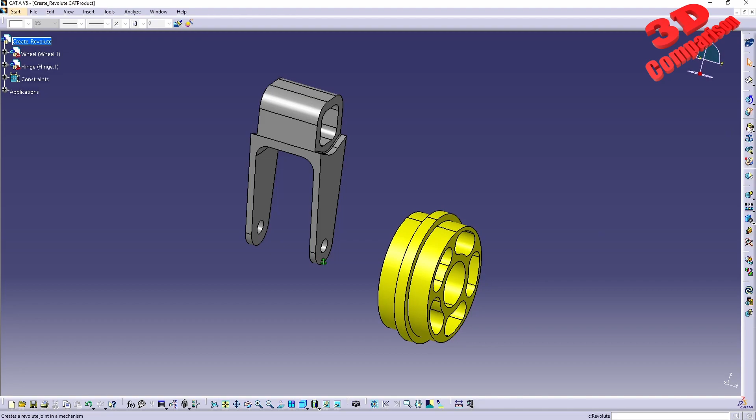And the first thing that we need to do within DMU Kinematics is to define the fixed part. So in this case, I will create a new mechanism. I will define a new fixed part for the hinge. And afterwards, using the revolute joint, I will select the axis. I know that in this case, I need to leave an offset of 2 millimeters over here. So I'll go for offset and 2 millimeters.

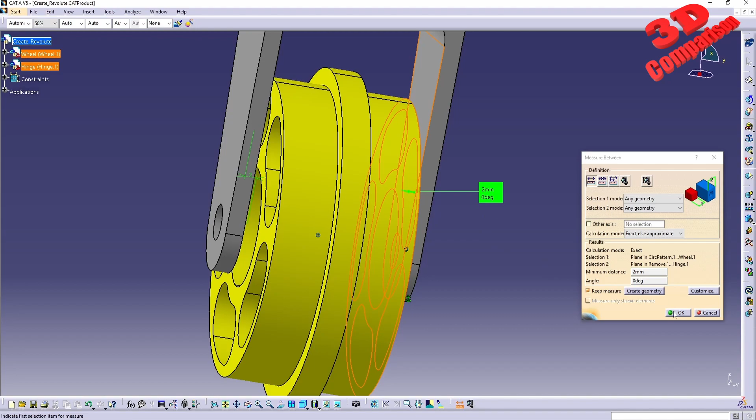And we're going to see that we're going to have the wheel centered. If I measure the distance over here, we're going to have those 2 millimeters just like we added over here. And if I expand the mechanism, we're going to see that we have a degree of freedom 1, because we still need to define this revolute to be angle driven in order to simulate it.

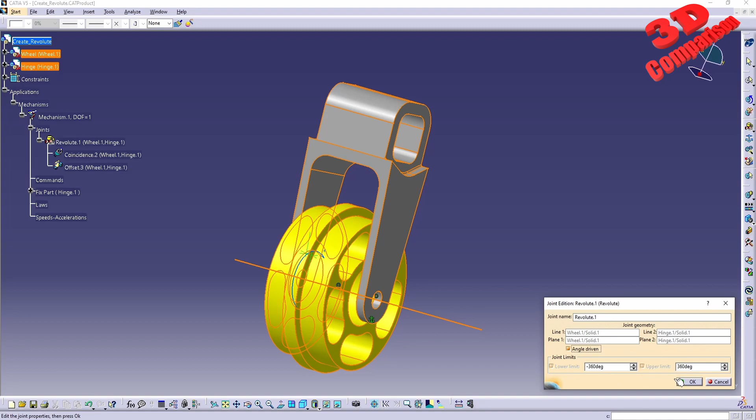So as soon as I choose this to be angle driven, we're going to see that the degree of freedom will go to 0. We can now simulate the mechanism. And if I select the mechanism, I will be able to simulate that. So this is a simple mechanism where we only had one joint underneath that mechanism.

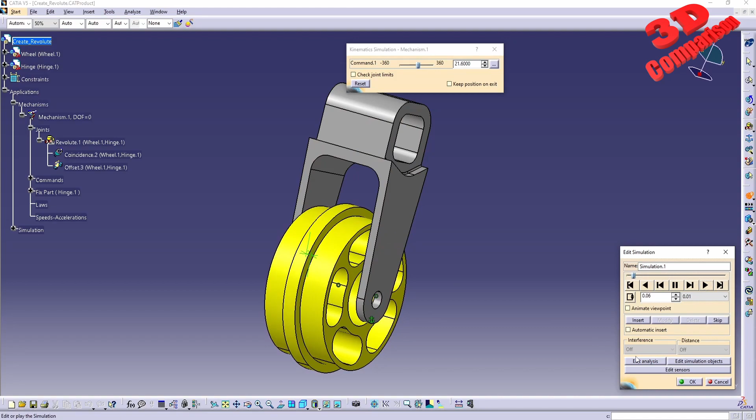But let me copy the same wheel and hinge over here and see how we can join those two within the same mechanism. So I will delete the existing mechanism over here. You can just select it and hit delete. Now I will copy the wheel. So select that, paste. We have the second wheel added, and I want to copy the hinge as well. So copy that and paste it again.

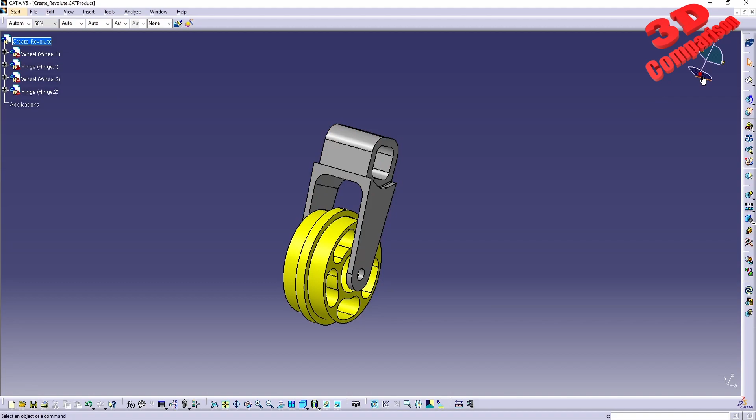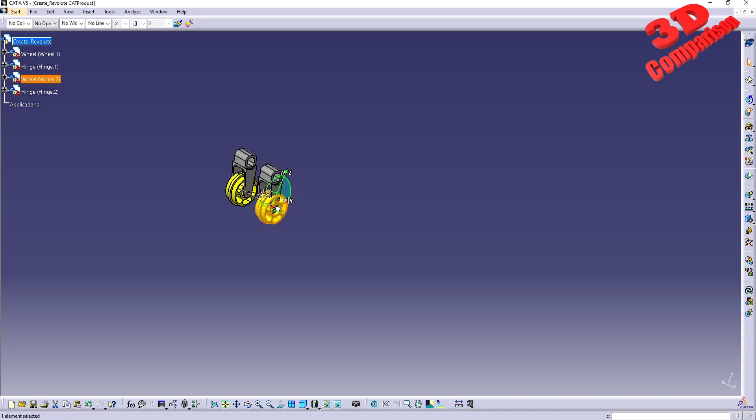Now, using the compass, I will move the second hinge. As we can see over here, the compass will not be centered to the object in this case. I will just move it over here. I will do the same with the second wheel over here. So I will just slightly position it over here, because afterwards we are going to constrain that using joints.

Now, if you want to add this to the same mechanism, it would be wise to add a subassembly and add both of those hinges within the same subassembly. So go to insert, insert a new product, and I will drag and drop those two hinges underneath the secondary product over here. So we have one moved, afterwards the second one.

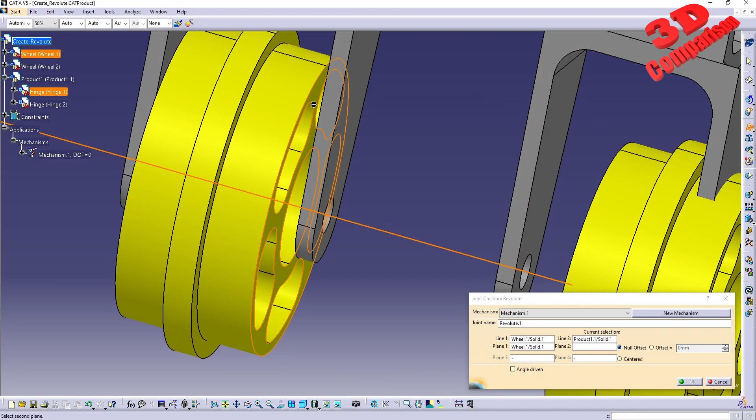Now, if I go and define a new fixed part, I want this to be for mechanism 1. Afterwards, I will select the product that will contain both of those two hinges. And I can go with revolute and define those. So we're going to have the first one. In this case, I'm going to go again with an offset of 2. And I will create a new revolute joint underneath the same mechanism. We still have mechanism 1.

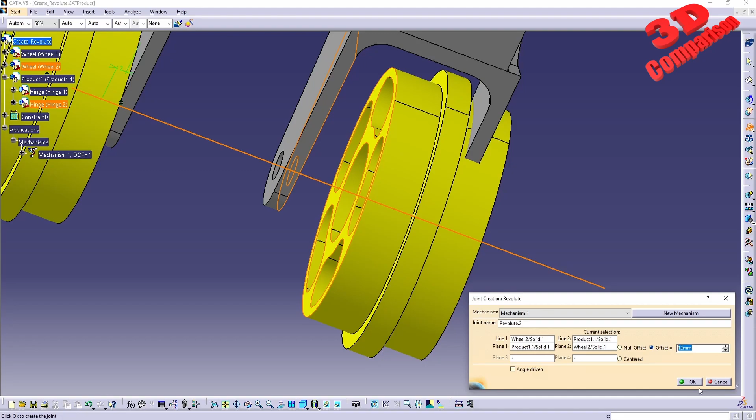And we're going to have the axis. Afterwards, the surfaces. And again, an offset of 2 millimeters. I can now cancel that. And if I expand the mechanism, I'm going to see those two joints. I have a degree of freedom of 2. Therefore, I will need to enable angle driven for both of those revolutes in order to simulate this mechanism.

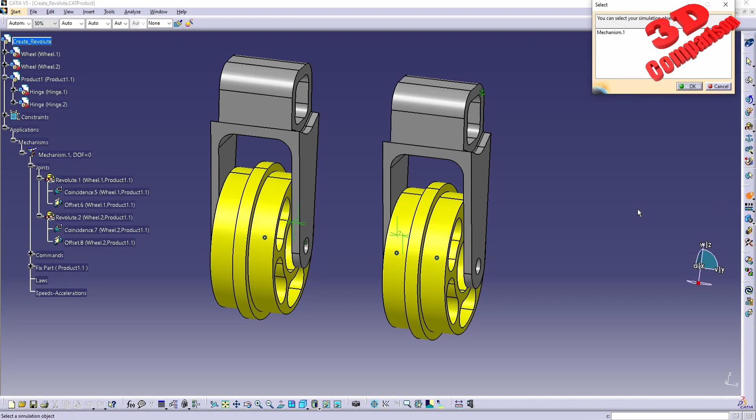And we're going to have the following message popping up. And now we can go with simulate mechanism 1. And over here we have the possibility to move those. For example, the first one, we can also change the limit. They're currently minus 360 and 360 degrees. You can change those limits over here, so the highest value.

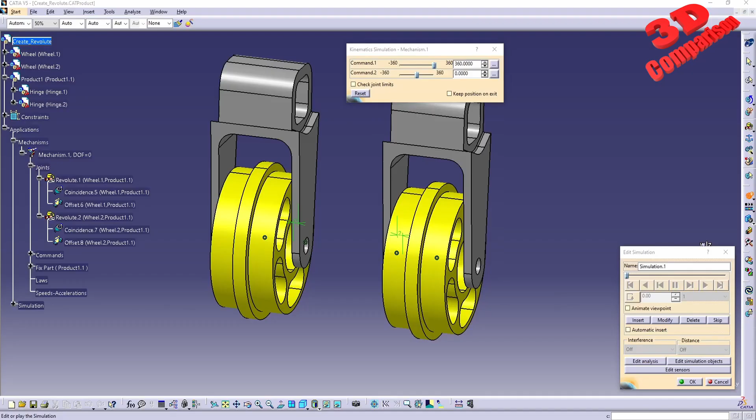And as we can see, this is how we can join multiple joints under the same command.